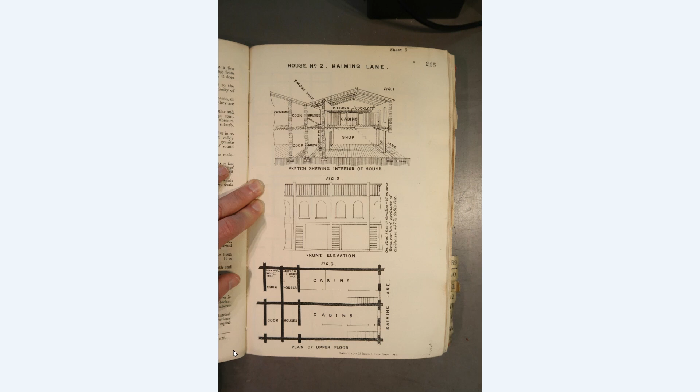Looking at the cross section, you can see that each building had 2 floors. There was a shop downstairs, and upstairs Chadwick describes them as cabins. So there are these wooden partitions splitting the upstairs into even smaller rooms. There's also a wooden platform here with a space above, which was known as the cockloft. At the back, we've got the cookhouses, and at the back of that, there is the dividing wall with the next row of houses built back to back with us.

Very little light, very little ventilation. We've got 2 windows at the front here. At the back, there's no chimneys. There's just a hole in the ceiling here and a hole in the roof here, and that's to let the smoke from the cooking escape.

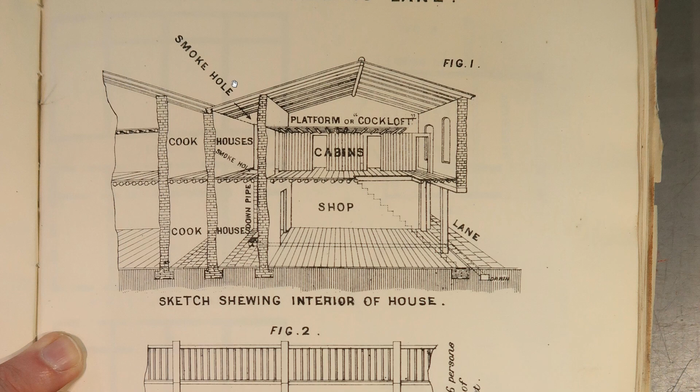Here's the front elevation, again with the shop and the 2 windows above, and also a note from Chadwick saying that on the first floor lived 5 families, a total of 16 people, so quite crowded. Here's the view from above, just giving a better idea of how the floor was split up into the 3 cabins.

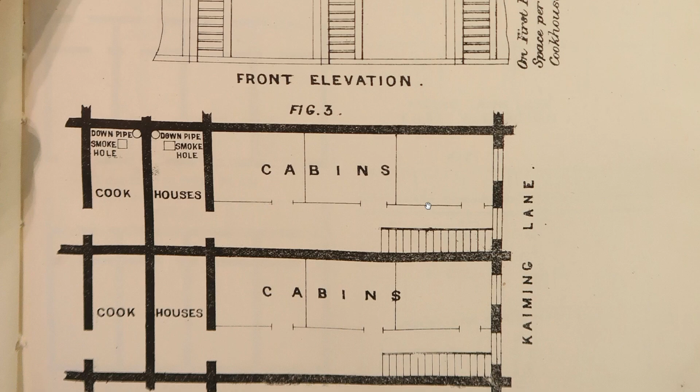Now our next plan shows much larger, more complicated buildings along East Street. These buildings were in Tai Ping Shan, which is the very densely built up area between the Man Mo Temple and the Tung Wah Hospital.

Around here. Chadwick hasn't labelled East Street on his map, and at first glance it seems to have disappeared from the modern map as well, but it is in fact here. We've got a Tung Street and a Sai Street, Donggai and Saigai, which means East Street and West Street in Chinese.

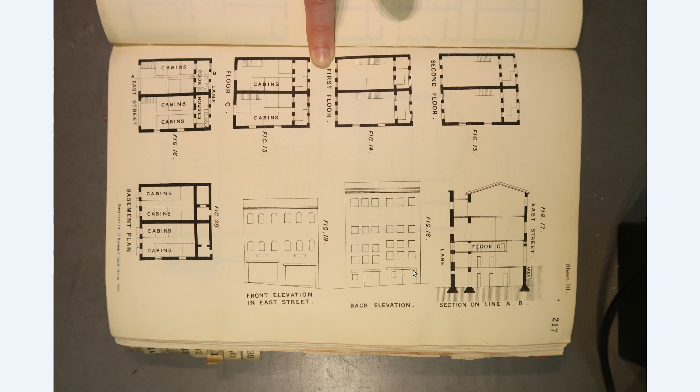You can see the building is much taller than the one over on Kaiming Lane, perhaps because they were a more modern design. As Chadwick noted, these were newly built and not yet fully occupied. The ground here is sloping. It's a sloping hillside. The building is cut into that hillside, so the back of the lane does have an opening, but the front here facing to East Street is cut into the hillside, making it very, very dark. He says you have to be careful not to trip over when you're inside there.

Now, when Chadwick visited, there were already cabins in the basement and on the first floor, and indeed the cockloft had already been set up, and that was split up as well into these 3 little cabins here. He spots that there are these double layers of windows here. So although the cockloft seemed to be a sort of a later addition, he said that it was clearly planned for when they built the building, just by the fact that there's these double windows here.

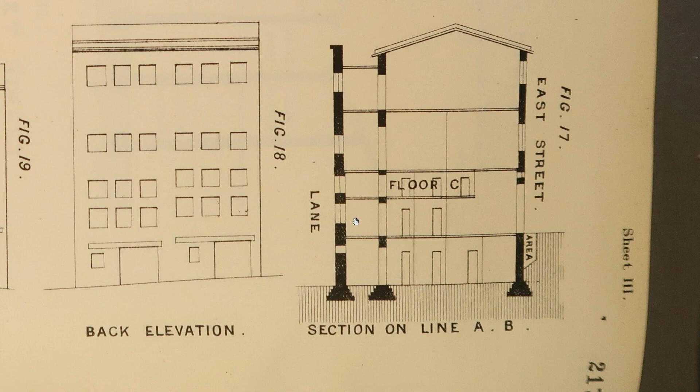Chadwick reported 80 people living in one of these buildings, and the ground floor here with its cockloft was the most crowded of all. It was split into 14 rooms and home to 41 people. Other plans in his report show more buildings from around Taiping Shan. This one's on Tank Lane. We've got one from Station Street, one from Market Street, Caine Road, Taiping Shan Street, and then a section from Wellington Street on the left right up to Gough Street on the right.

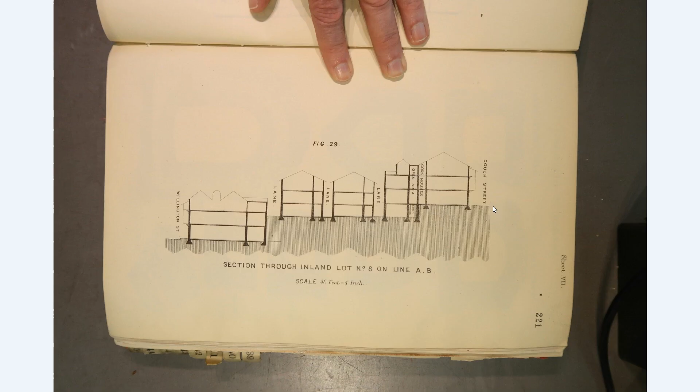Chadwick starts part 2 of his report by stating his goals as a sanitary engineer. He says he wants to give Hong Kong's inhabitants pure air, pure water and light, and to take away all organic waste before it has a chance to rot and contaminate the water in drinking wells or the air. So the plans of the houses we just saw were part of his conversation about providing air and light. And now we'll turn to supplying the water and taking the waste away.

So here's the section on water supplies. Chadwick found Hong Kongers were using a variety of water supplies. Most of the piped water at that time came from the Pok Fu Lam Reservoir, obviously still with us today. And there was also a smaller supply from what he called the Wong Na Chung Dam. I wasn't quite sure what he meant, but if we look back to his map, he's labelled it right down in the bottom corner, down here. So it was a dam on the stream that flows down into what we call Wong Nai Chung, or Happy Valley, down here.

If we switch for a moment over to a later map, the 1901 map, the dam was still there, and it was called the Blue Pool. That's a more familiar name, and that gives its name to the Blue Pool Road today. Chadwick also found many wells in use as water supplies, and over here he takes samples from them. He says all the samples were turbid, so cloudy, and most of them very much so, but if you gave them a bit of time, they settled down and the water was very clear.

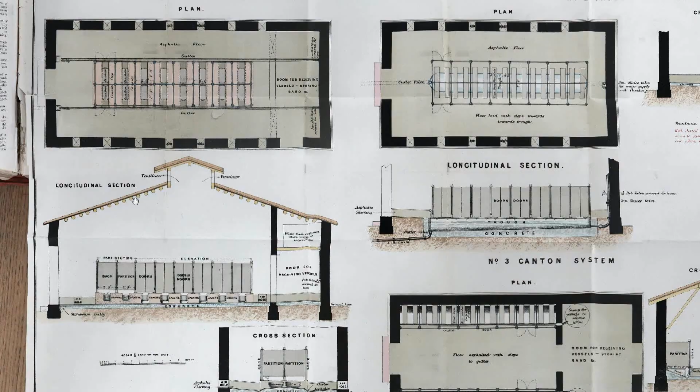He also included them in his collection of sketches - not just any sketch, but colourful this time as well. He's given us three to admire, so you can choose between the modified bucket system, the trough system, or head a little bit north and try out the Canton system. Three different styles of latrine to choose from.

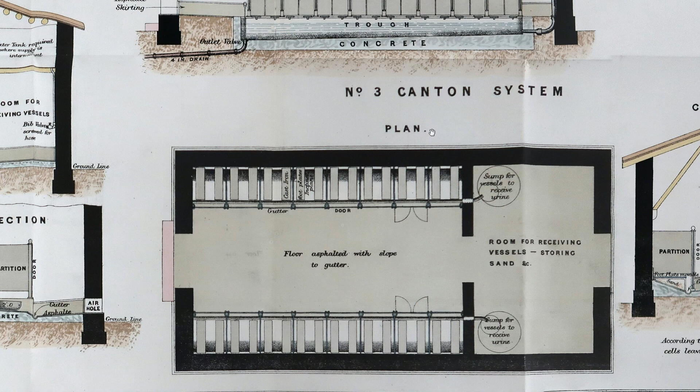Now, after you'd used a pot or visited the latrine, what happened next? Well, every night the night soil was collected from the house's pots and from the latrines around the city and taken to boats waiting at the seafront, which carried it around to Lapsap Wan, or Rubbish Bay, which, as you'd expect, was over at the far end of the city.

For example, if you used a pot or a pail at home, you'd have to pay a local labourer to come and empty it out on a regular basis. And it seems at the time you had a choice - you could pay for a daily service, an alternate daily service, or just twice a week, depending on what you could afford. And again, I'll put a link to the full document in the description below for that.

Now, after Chadwick's thorough report on the current state of sanitation, he turns to his recommendations for how to make things better. He had strong words for the government about the water supply, telling them to abandon the present barbarous and dangerous intermittent supply. At that time, the water supply was only turned on for several hours a day, but Chadwick wanted it available 24/7.